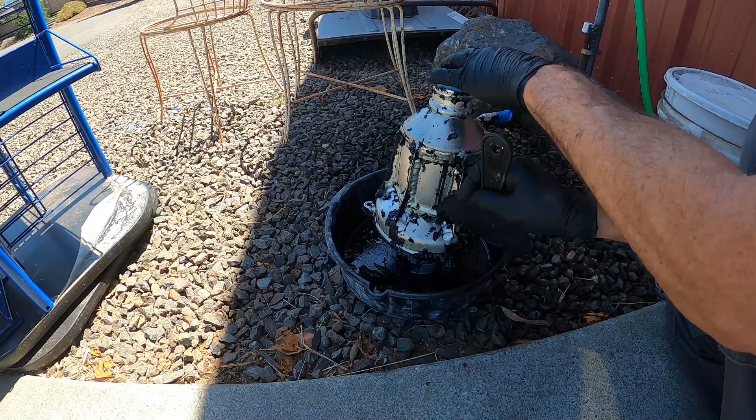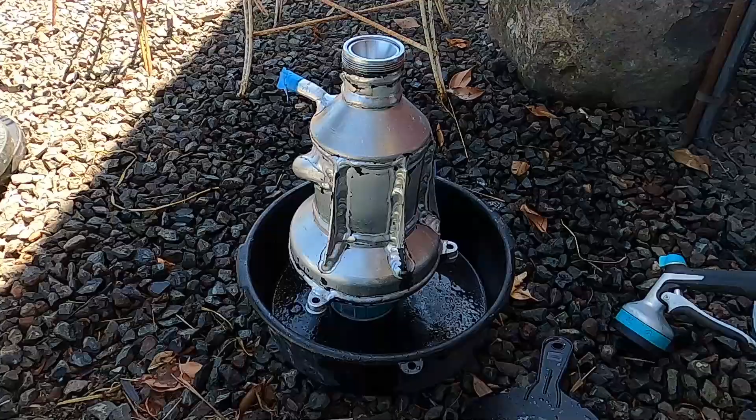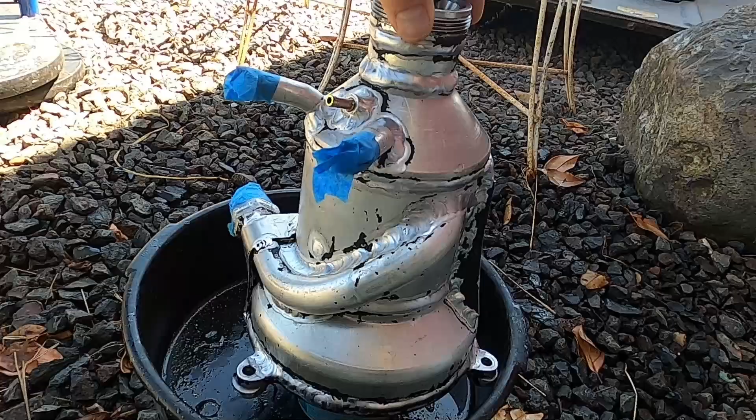Well, I gotta say, that's pretty good for round one. I mean, it got all but the nastiest stuff, and even some of this stuff, if you go at it with your fingernail or a little plastic scraper, it comes off. So I'm gonna give this one more go and see what that does. Kind of cool. Anyway, I'm gonna see how much more of this I can get off and see what we can do to get it wrinkle blacked.

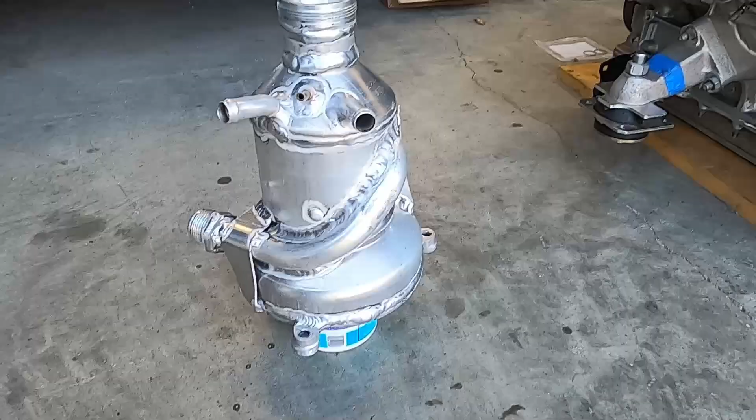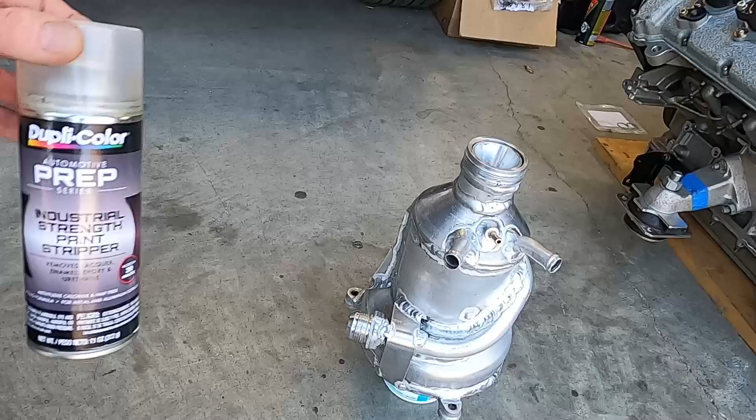Well, all right, check that out. That is two and a quarter rounds of stripper, and man, I could not be happier. That was a lot easier than I thought it might be. So I am going to give a Red Barn 5-star seal of approval to this Dupli-Color Automotive Prep Series Industrial Strength Paint Stripper. This stuff is great, at least on Ferrari air oil separators.

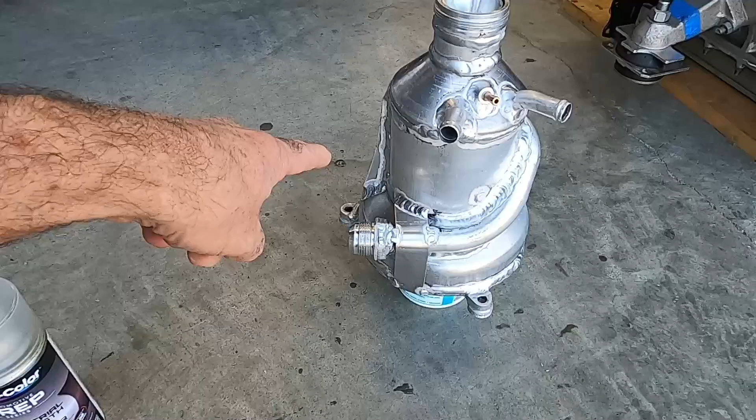I can't tell you how it works on anything else, but gosh, was it maybe a total of 30 minutes of working on that? And yeah, you can still see some traces, but by the time that wrinkle gets on there, it is not going to be visible at all. Like I said, very mechanical looking in raw aluminum, but I don't think it quite fits the vibe of the build. But yeah, lovely, lovely, lovely. So yay, that worked out great. Now to try the VHT Wrinkle Black and see how this thing turns out.

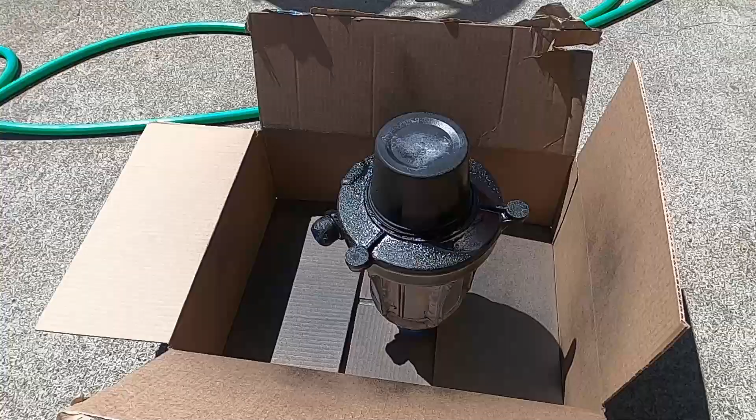All right, here it is with 2 coats. And it needs a third, and I got a few more minutes to wait on this, but you can already see it's starting to wrinkle. And the fun part is it's got an underneath side, so I'm doing the underneath first, sort of to make sure it's doing what it's supposed to do, and then I'll flip it back over and then do the much more visible part.

So yeah, this is the VHT High Temperature Wrinkle Plus, and you know, home done. It's looking pretty good so far. It's starting to wrinkle up just like it's supposed to. It's got one last coat, and we'll see how this turns out.

Not great video, but there's coat 1. I moved it into the shade, flipped it over. The bottom's turning out pretty nice. Flipped it over and gave it coat 1. It's all smooth and nice and shiny still. So it just got put on. You wait 5 minutes between coats.

Well, that's the third coat, and a little bit of time in the sun. I don't know if you're supposed to do that. I've been rotating it here every few minutes, and wow, I don't know if I'd call it OEM, but it's definitely wrinkly finished, and it's pretty consistent. It looks really good, you know.

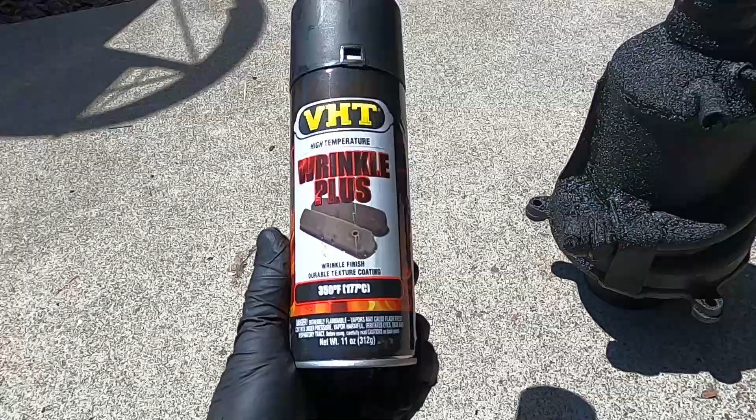So I gotta say, between the paint stripper and the VHT High Temp Wrinkle Plus, another 5-star review for this stuff. Boy, oh boy, that looks great. And when that plenum gets back, it's going to be super cool looking. Lots of little things to do.

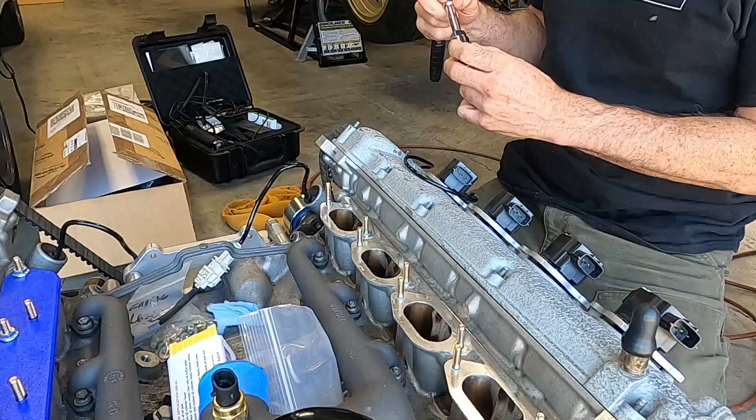The intake mounting studs were off the car, so I got some new ones. And this is kind of a cool tool. I've never had one of these before. A stud remover installer. It's a lot easier than double nutting these things. It just goes right over the stud and grabs it evenly and just right down till it, you got to be careful you don't run the tool into the part you're threading the stud into, but a little bit of blue Loctite on there.

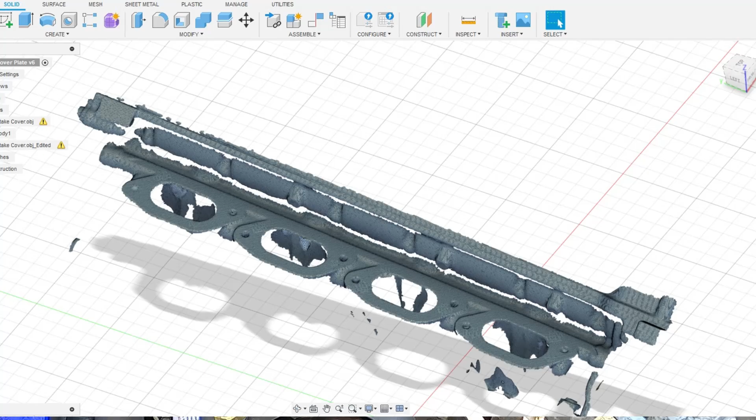And in the background there you see the scanner, and so I went in and scanned the intake manifold mounting surface, reverse engineered those locations, and even went so far as to put some fancy extrusions on the back, completely unnecessary. And so that's why I made this one red, because red is for the right side of the engine.

I could have designed it slightly differently, but I actually just traced, my drawing went around the base of the manifold mount, and so each side is reversed. So anyway, we got red for the right, blue for the left, and we have a nice tidy little protector to keep crap from falling into the motor whilst the intake manifold's off.

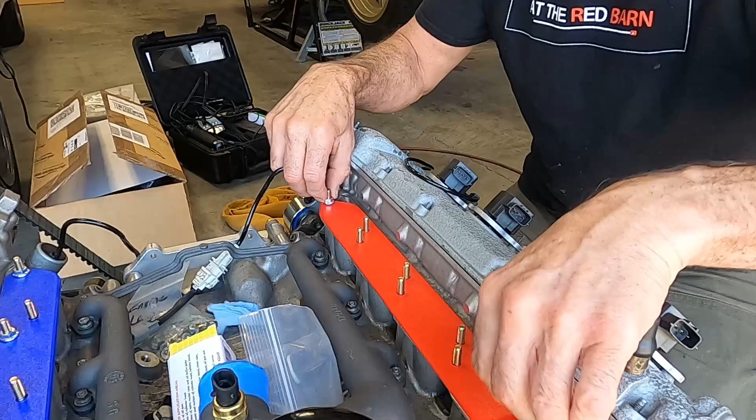And I built this because at this point the lift does not go high enough. My QuickJack there does not go high enough to get the engine out of the car with the intake manifold on it. So until I have a different solution, if ever, I need to pull the manifold off. So if that's going to happen whenever the motor goes in and out, which hopefully isn't a lot, but inevitably will happen at some point, I want to be able to protect everything in a nice tidy way, not have tape, not shove rags down in there. So we got a nice little setup for that.

So a number of you have commented about this section of the suspension console and, hey, a bunch of junk's going to end up back in there. What are you going to do about that? So I imported the DXF file that was originally used to create the sheet metal piece that is that suspension console cover. And I used that to build out the basic shape.

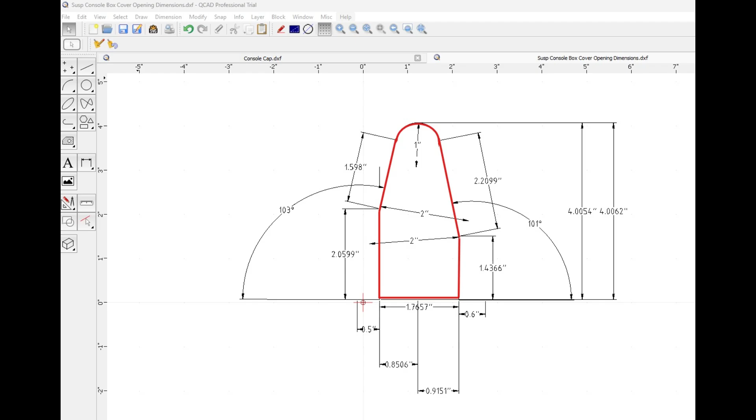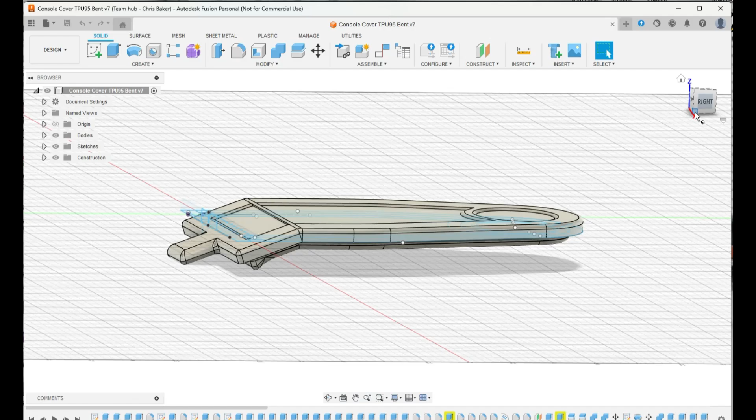And if I reorient this, you'll see this little teeny inside section that's the middle of this notch. That is the shape of the opening in the console. And so I took that shape and just built out this model around it, including bending it around the corner, if you will, and adding this little pull tab at the bottom to make it easier to pull off. And then I tried to dress it up a little bit by adding some embossing and some fillets on the corner.

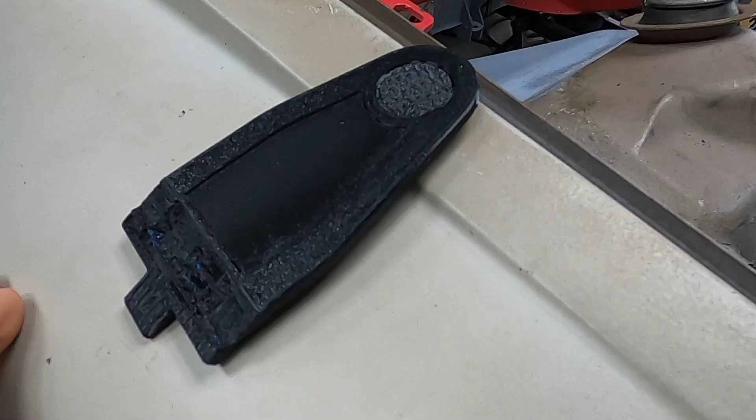So here you can see how that turned out. I think the texture is probably coming through. This outer surface, because remember it was printed like this on the printer, picks up its texture from the build plate. And the texture here and here in the embossed areas is the surface texture that it picked up from the support material that's laid down to fill those gaps, because of that embossing.

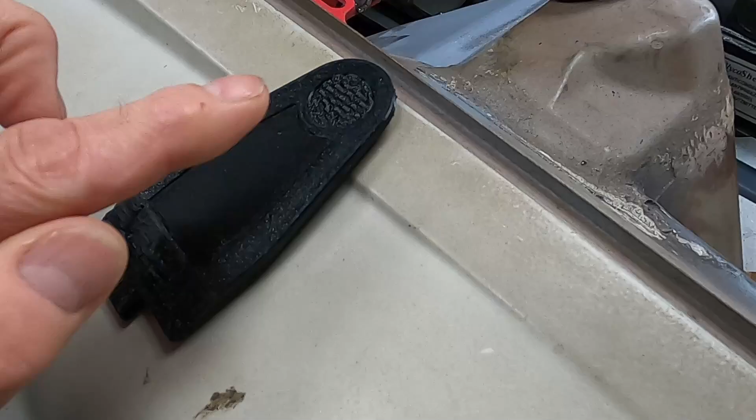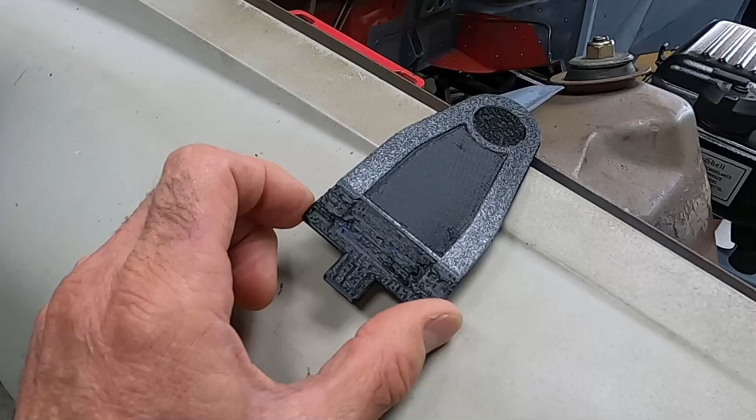And then the lower portion, which has this completely ratty section, is because A, it was printed against support material, but B, the support material wasn't sticking properly. And, again, that's on me. I've got settings that I'm sure I got wrong. But that approach isn't going to work because I want the part to be consistent. It fits okay, but it doesn't look anywhere near good enough.

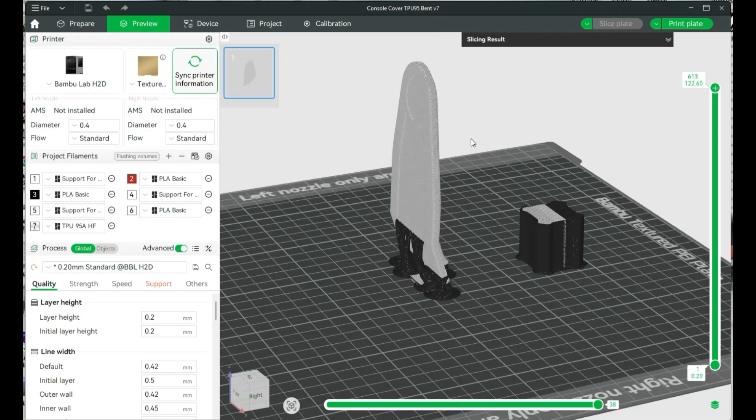And so I ended up going back and trying something different. I ended up printing it standing up. And you can see this is now showing you the support material. And at first I thought, there's no way this thing's going to print this standing straight up, but it sure does. But here, let's go take a look at what came out of this and how it looks in the car.

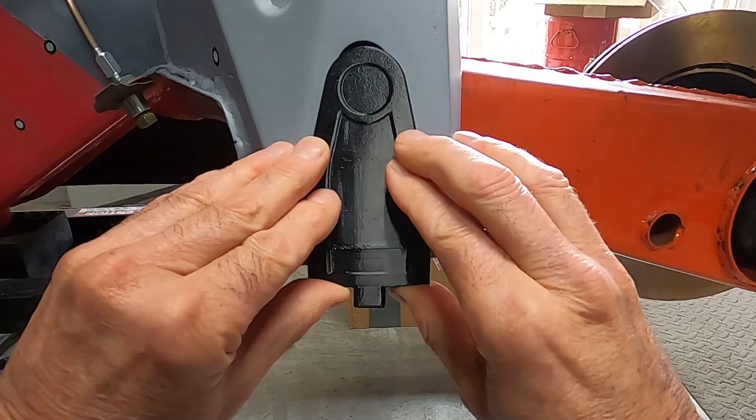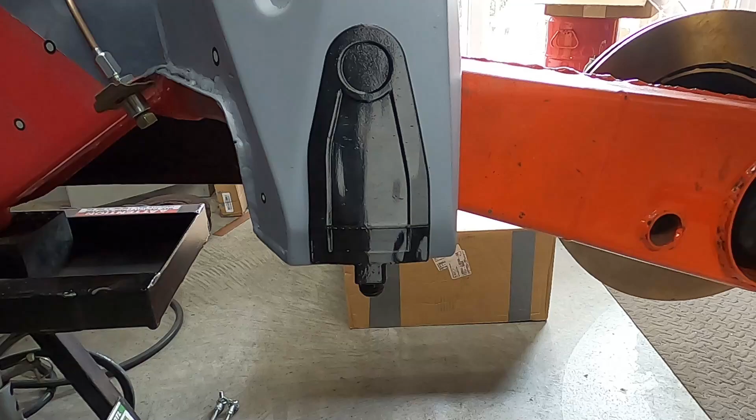And I'm sure it's not going to be taken in and out 100 times during its life, but I'm really pleased with this. It's a little fiddly putting it in, but once it's in, it's not going anywhere. That's awesome. So other than the surface finish, which I'll keep chipping away at, in terms of the design and the execution and the function, I think I've achieved the goal I set out to achieve.

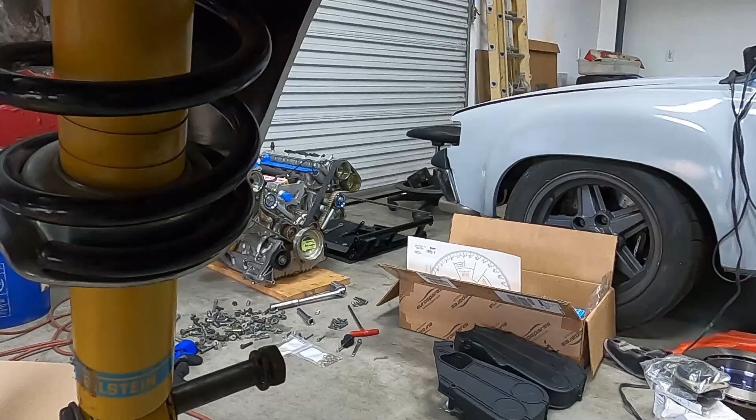All right, now I get all excited about this, and then I'm sitting here and I'm glancing around at things, and one of the things I glance over at is the engine cradle, and I realize I completely forgot that the engine cradle sits here and comes out. So this tab has to go. But, what else is new? I get to redo it again. So the good news is we're right on track for how we always do things here at the Red Barn.

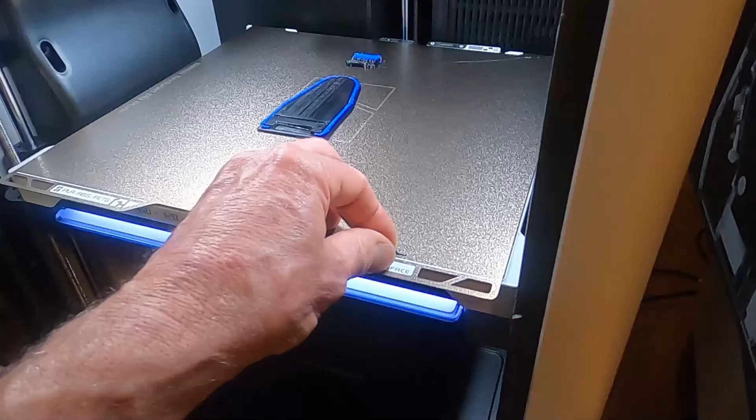Okay, I just finished printing the latest version of this cover, and literally it's just finished printing, so it's still a little bit warm in there. And so you can see, you can just peel these guys right off the build plate. And here's how it comes out. I thought you'd get a kick out of this.

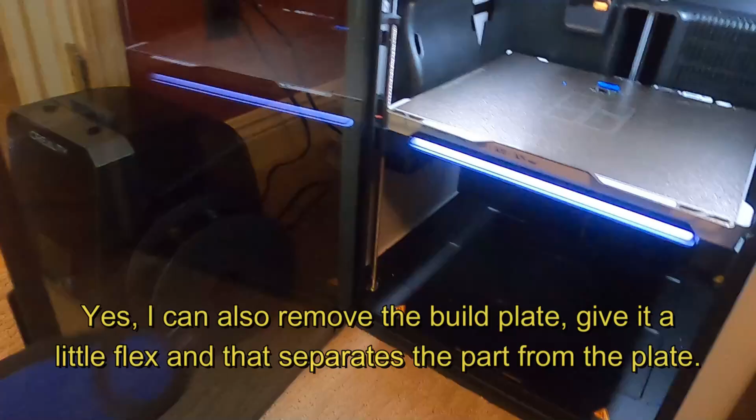And here you can see, this is the support material. It just happens to be blue PLA. And that's just taking care of the embossing, because remember, it was printed like that. And here you can see the support material that's gotten laid down to support the upper ledge of that groove. And so let me see if I can get the camera put down here in a way that you can see, and I'll try to take it all apart here.

But again, it's flexible, so if I just peel this out, out comes the support material, and there's my embossed area. Looking pretty good. Let's take this one out. And there's that. So I like that. That looks pretty good. And I like this texture it picks up from the build plate. And now this part sometimes is a little tricky, but let's see. And there's the support material out. But there you can see that groove.

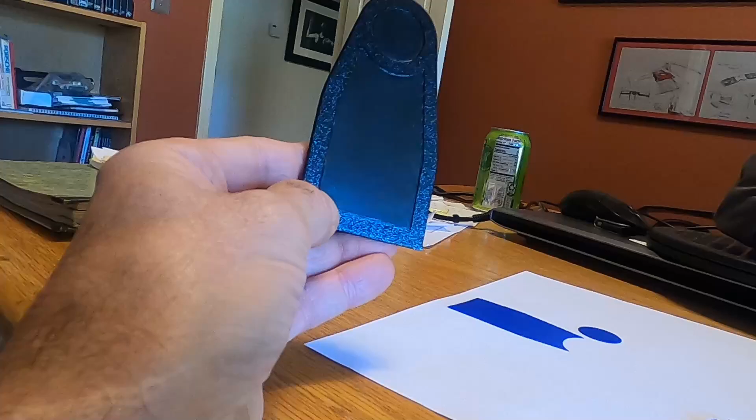And there's my part. Now I opted not to build the bend into it, and you can see I just put a relief in the back right at where I want that to go around the corner, so it's a little easier to get it to go around the corner. And that meant I didn't have to deal with the surfaces being different in any of these areas. And again, I'm maybe chickening out, but I'm really happy with how that looks. Let's go see how this looks in the car.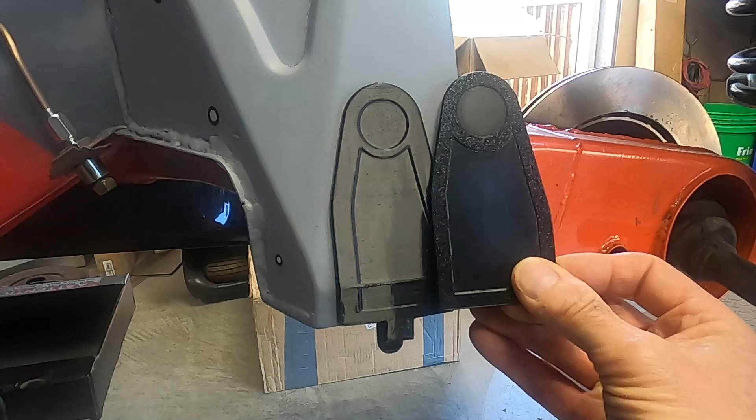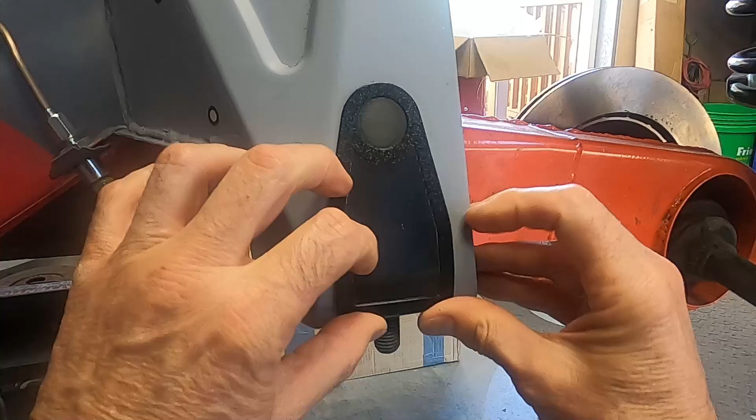Okay, here's the one I printed straight up, and you can see it's very smooth surface and very shiny. Compared to the one we just pulled off of here. I'm trying to get it so it's in the reflection, and you can see it's much more matte, and with those different surface textures, it just looks more like a production part. I think so anyway. But I will say I'll miss the tab, because this is a great idea. I really like this. You just grab it and boom, out it comes. But anyway, let's put this one in and see how it looks. That's it. There it is in place.

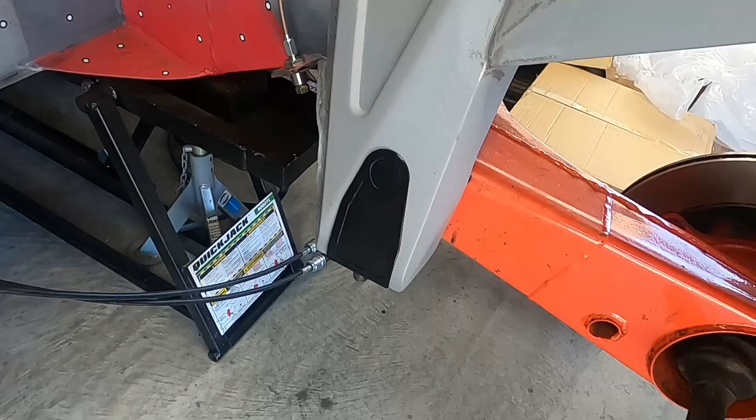So now I just go into Fusion, make a mirror image of that, print one of these, and we will be all set. And then one print job later, and we have the driver's side console cover printed and fitted. And so, a nice matched set of those, and that's one other little project off the checklist.

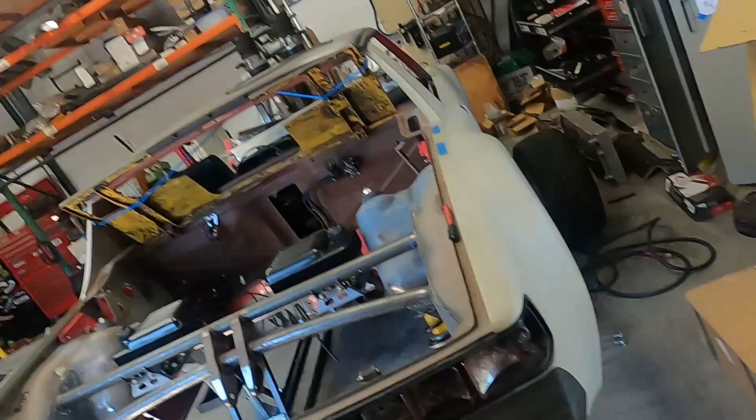Oh, and the other thing is, I'm waiting for the plenum to come back from powder coat. So fingers crossed it looks as good as I hope it looks. That's going to be pretty exciting.

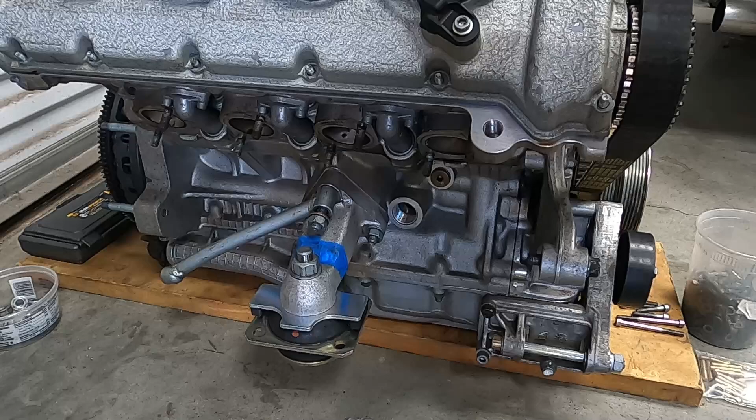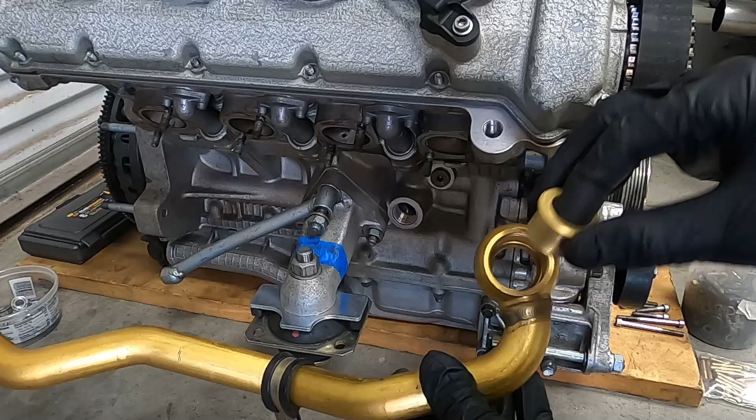And the next little bit of unique Ferrari-ness is this low pressure return line. This is the output from the low pressure return. And as you've seen in the past, this is the line. And so check out what it has to do. It has to come out of the engine and get through this fitting, and then into the line up to the oil cooler. So check this out. So there's this Allen key through hole threaded part that holds, I gotta kind of do it this way, that screws into the case and allows the oil to come out and flow into that.

And then it gets this cap that screws on just over the banjo fitting, if you will. But how trippy is that? And then the other fun part is these seals are, they call it a Dowty washer. It's part rubber and part fabric-y sort of a thing.

And there's one that goes on the inside around these threads on that hollow bolt, and then one for this outer. And these are like 35 bucks a piece. So it's just more fun with Ferrari. So I'm gonna go ahead and get this installed now.

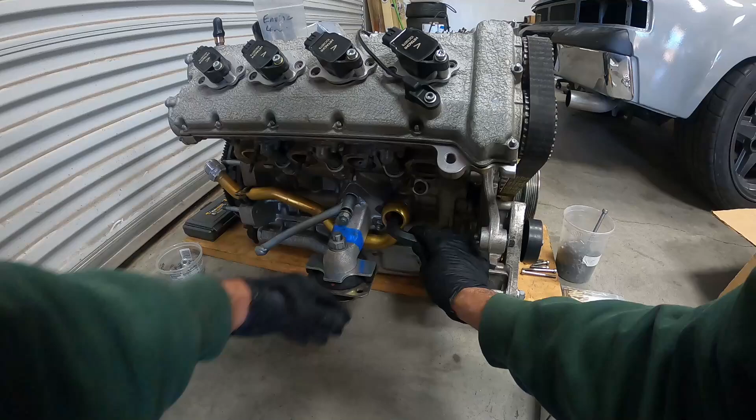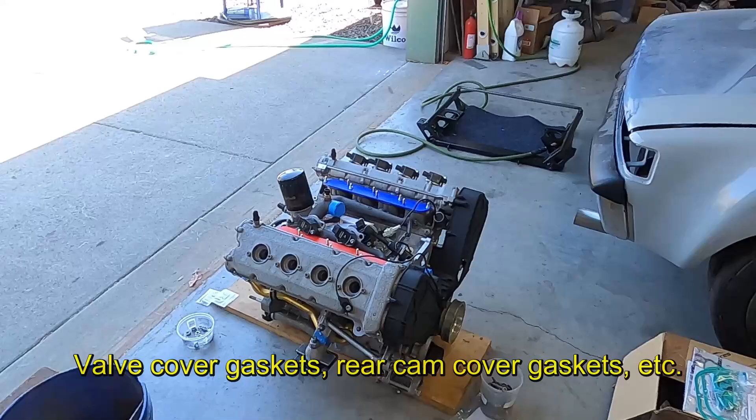It's the final stretch of putting this thing together. All the parts are in, so I've got to put a few things together on the motor, and it will be ready to go in the car for the last time before we try to fire it. So let me get this done.

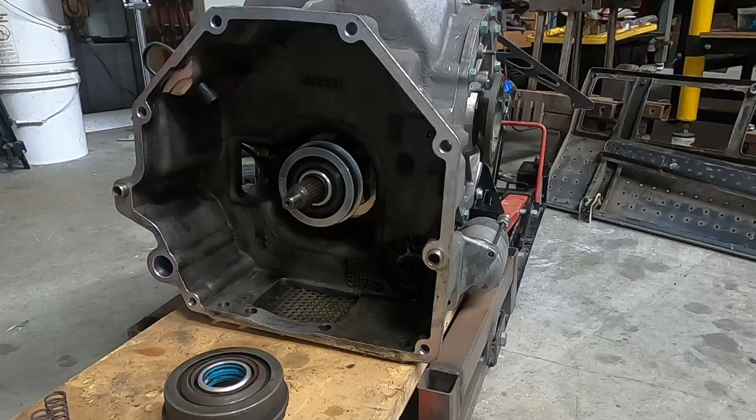And it may not look any different, but that is one buttoned up motor ready to be mated to the trans. The Hill Engineering throwout bearing has been installed, and I didn't bother filming it. It's just tedious, but it is a little bit interesting in that this throwout bearing is crazy.

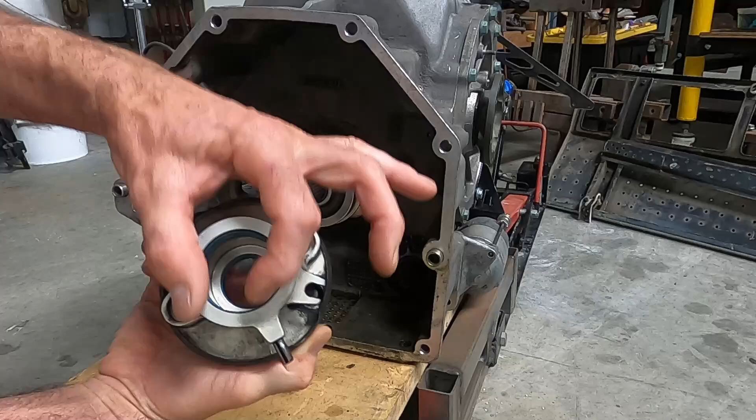It rides on this big, huge aluminum flange where oil's pumped in through this flange and into here, hydraulic fluid, right? And actuates this thing. And it seems overly complex, but it may be because this gearbox is the exact same setup as what's used in the paddle shifter version of this trans that has to be shifted by a hydraulic computer-controlled pump system and blah-de-blah. So I'm wondering if that's why this is so complicated.

For instance, this pin, where it just runs a roll pin in the manual version, this is replaced in the F1 system by this magnetic sensor, so the thing knows when the clutch is disengaged or engaged and all this other magical crap. And, you know, it's this kind of a thing, right? There are these springs that have this little seat that they sit into that runs into the back of this aluminum flange that bolts to the case, and getting this thing put together is just crazy fun.

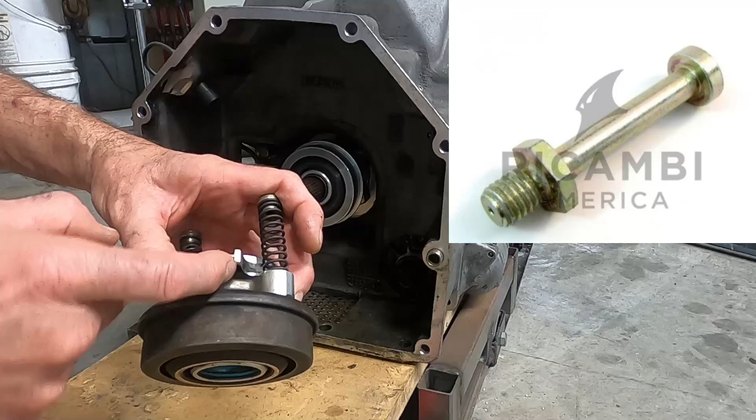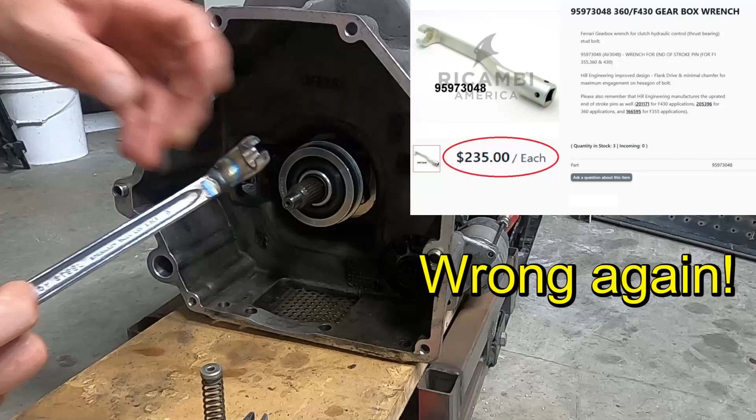And then once it's partially installed on the seals, it's got these stroke pins that clip into this little section and are a thrill to put in because it requires this oddball special Ferrari tool, which I wasn't going to pay like 235 bucks for, so I made my own, so that you can reach this split component over the pin and then get it onto the nut surface back there and tighten this thing down, torque it to spec and all that good stuff. So one less thing to do that will be absolutely critical to getting the car running.

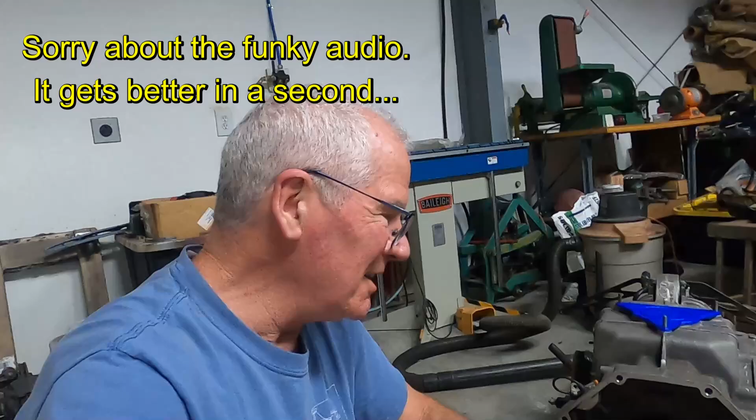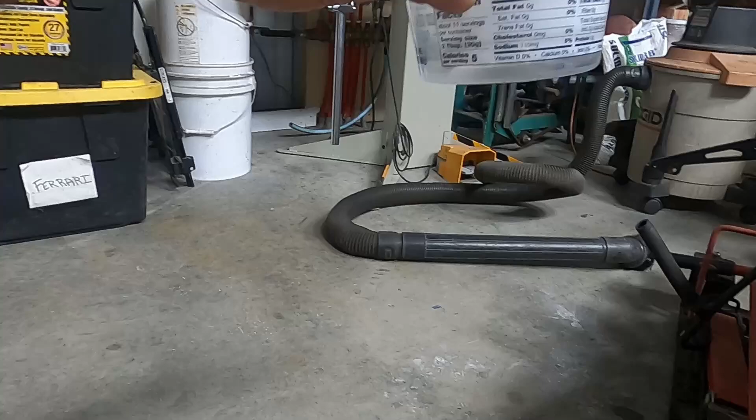And then I got sucked into the world of 3D printing again, and I had forever been plugging the hole to protect from junk getting into the trans, you know, getting into the dry sump tank. This is the dry sump tank for the oiling system that wraps around the differential.

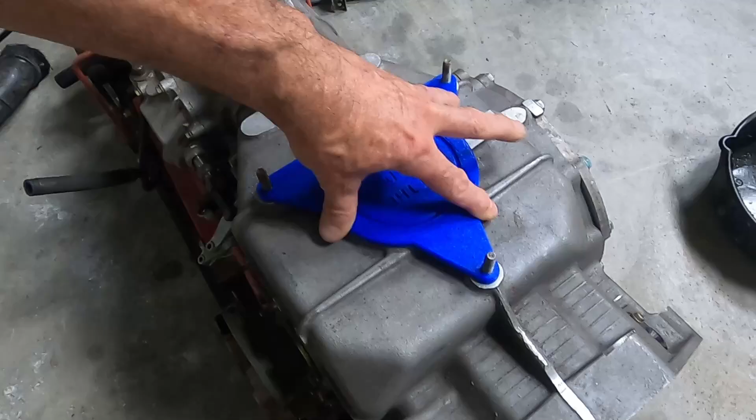So spoiler alert, you already saw it, but I printed this Red Barn branded little cover plate, so that instead of just shoving a plastic container down in there, I have something that keeps junk from falling in there, and I can secure it down with some nuts. But that was kind of fun to make, another little project. But the trans is essentially all ready to go.